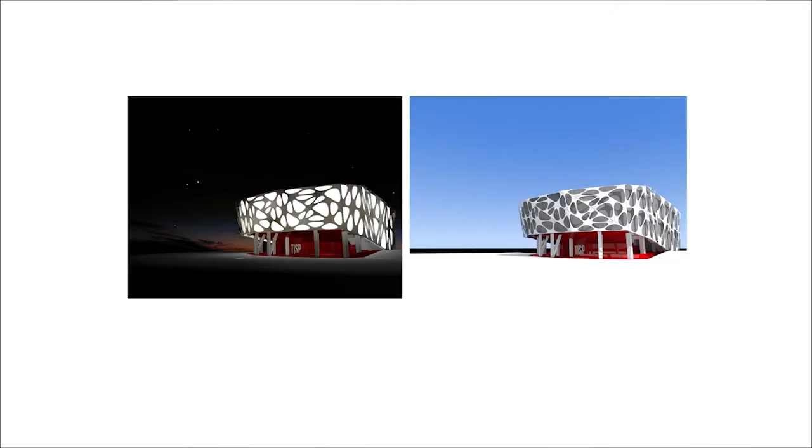The brief was tough because the building itself is already quite iconic, so they wanted another iconic auditorium on top of an iconic building. What we tried to do is create a simple form, because my boss always said iconic buildings normally follow this 3-second rule - if you can draw it in 3 seconds, it's a nice, memorable form.

The idea was to create this auditorium as an iconic building that you can see from far away, because the school also ran out of space for outside events. So the idea was to make it iconic enough that people from outside could view it. It's recently completed - this is how it looks now.

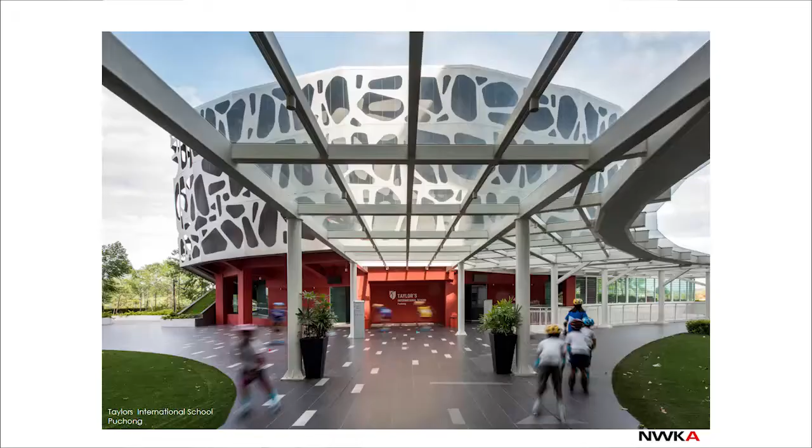We created this form using a Voronoi pattern to cut the facade, creating two faces of the building. During the day you can see the Voronoi pattern in white, but at night we illuminate the facade and it creates a lantern effect, which was quite hard because we needed to make sure the light is even. We used LED lighting to illuminate the facade from behind, so you can see the silhouette. That's the first project.

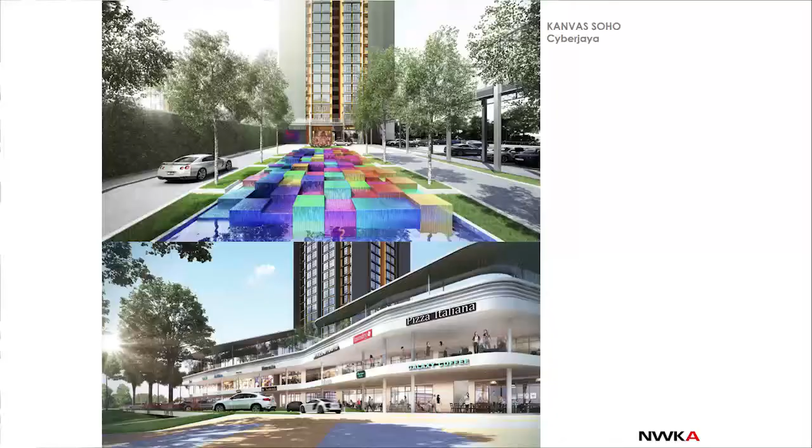The second project is one of my earliest works with NWKA - this is Kanvas Soho, a 450 square foot Soho located in Cyberjaya. The brief was to design a very efficient layout.

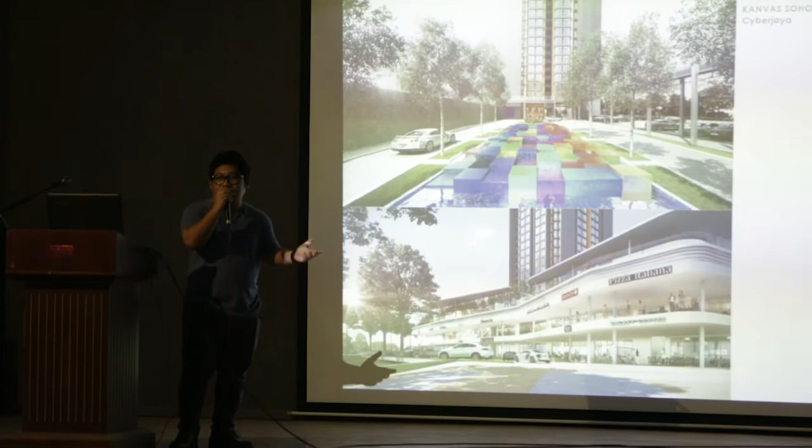So we came out with this point block tower sitting on two levels of car parks. The idea was to make the building not obviously reveal its car park - normally in high rise buildings the killer is the car park podium, so we tried to make everything work on the lower floors without showing it. It's currently almost completed.

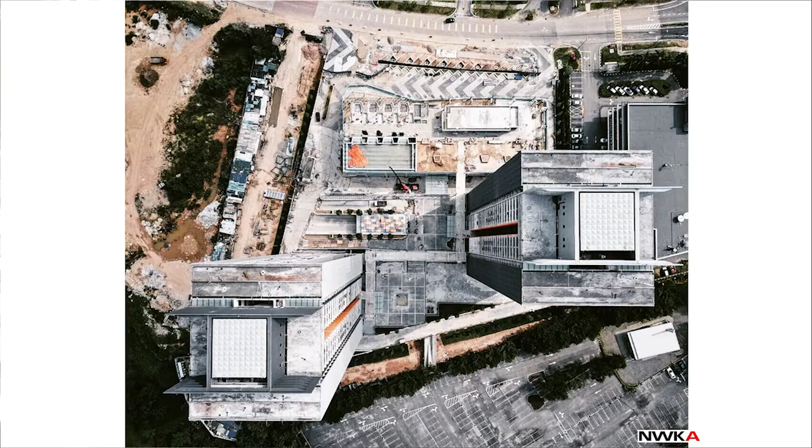This was taken earlier this year. I think the VP will be in September, if I'm not mistaken. That's another view of it.

The third project is OUM, Open University Malaysia. At NWKA, we've done a lot of education facilities as well. For this project we were invited to compete with other architects, and we tried to create a really interesting form. The idea is the same across all our education projects - we try to create a student-centric campus rather than an admin-centric one.

For this one we have three wings and one hostel tower behind. What we're trying to do is create a really lively student center in the middle of the campus.

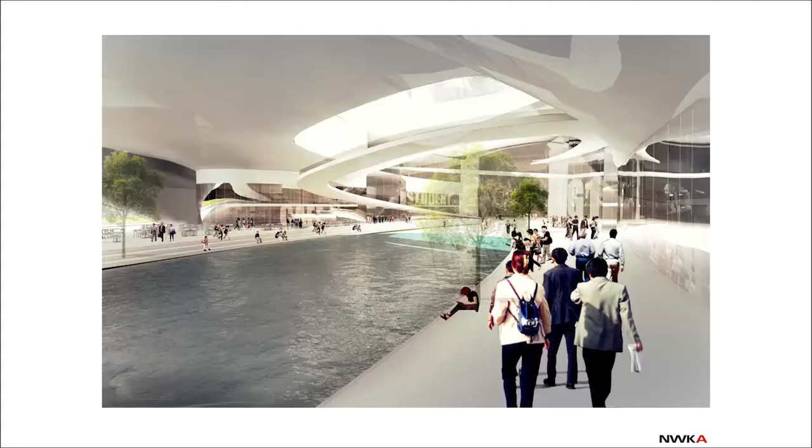Unfortunately, we didn't get the project. I think looking at the form and everything, they are not comfortable with the cost. But it's really an enjoying experience, I would say.

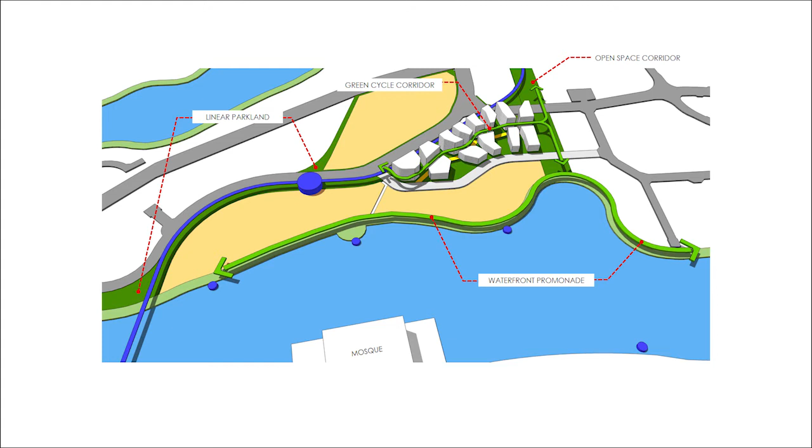The next one is Cycatree in Putrajaya. This is also a competition, we've been invited by PJH, Putrajaya Holding. The brief is simple, just to create this mixed development. So rather than just creating the same building everywhere, our idea is to get what are the things that we can bring to Putrajaya.

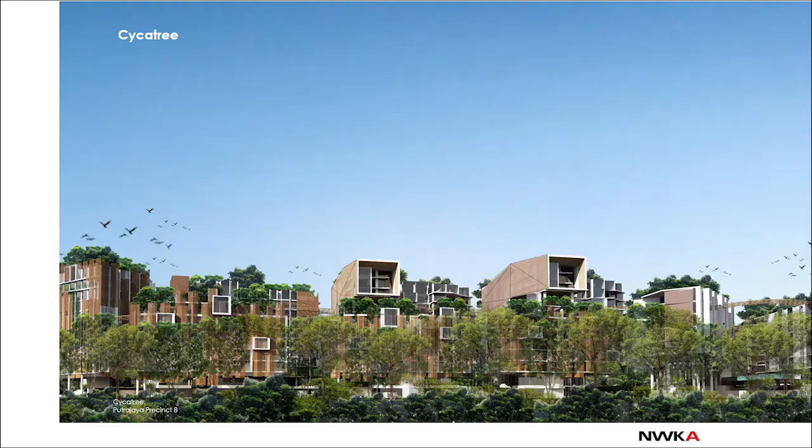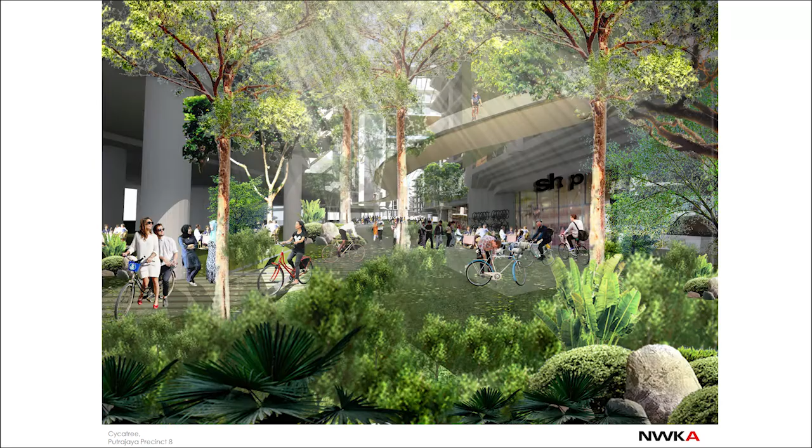We're thinking of this cycling experience in Putrajaya, because Putrajaya is really a cycle center, I would say. The idea is to create the whole ground floor as retail, some park, and some car park below. From ground floor, it's more like an alfresco dining experience, some cafes, some retail. We've tried to connect all the buildings with a cycle park.

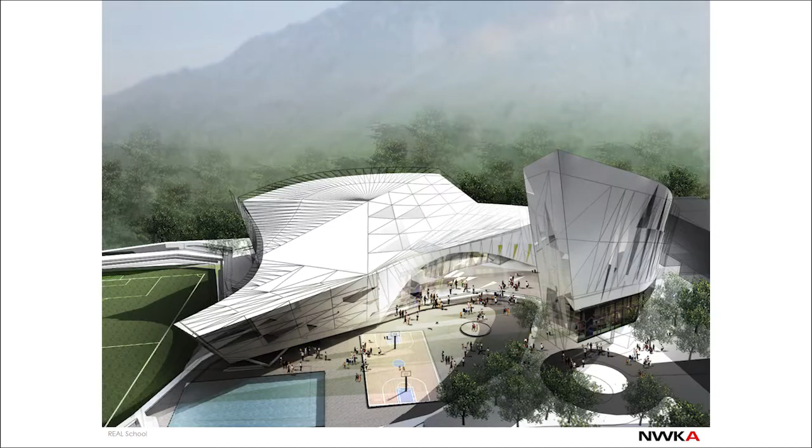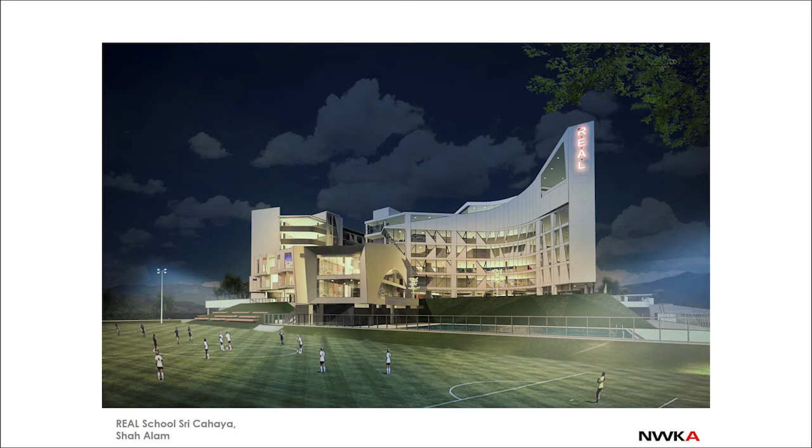The next project is Real School in Shah Alam. This is also a competition, because we've always been invited to a competition. For this project, we've won the competition, and the client decided to go with ours. But after we came out with this, it was a budget burst. So we came out with another option of design. Right now this is the current design, currently in building submission.

Other side of architecture that I really like - some will say it's like a dystopian vision or something like that, but I believe we need to think about it as well.

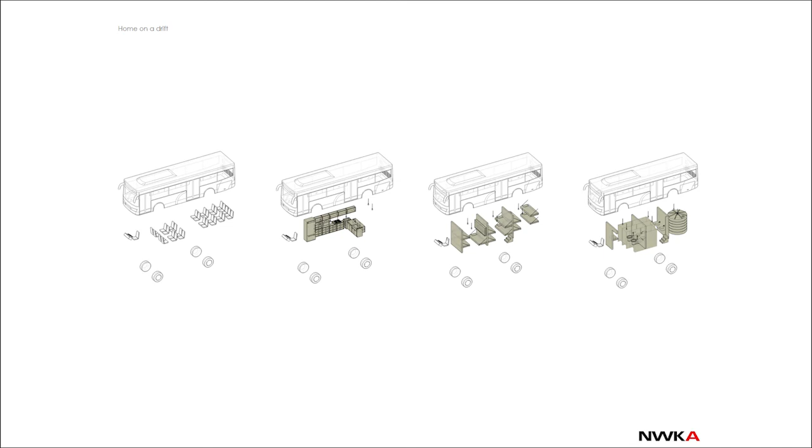The first one is Home on a Drift. This project is actually a PAM competition, a temporary shelter competition. We've won honorary mention for this project. The idea is simple - instead of just finding a space or land which is very scarce in KL, we've decided to use what we have, which is a lot of abandoned metro buses in KL.

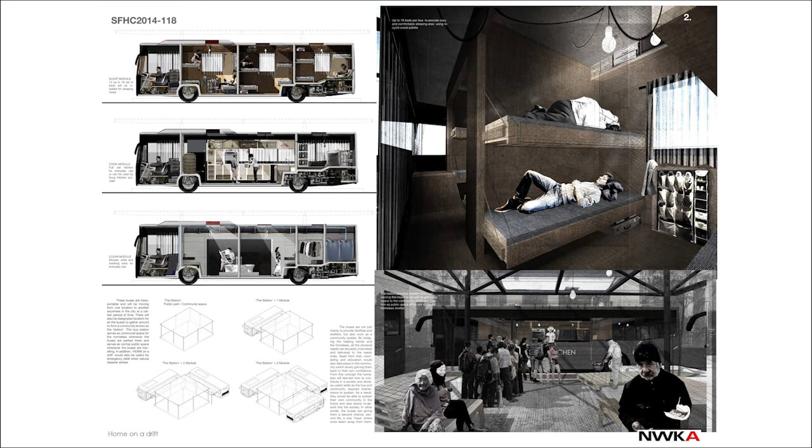So we've decided to use that bus again and create different modules. The first one, as you can see, is the sleeping module. The other one is like a kitchen, and the third is like the toilet module. So basically it can be like a transit center for the homeless.

The second one is Oi Poloi, which means common people. This project we did for the HYP Cup in Hong Kong, and we've got another honorary mention as well. The theme is 'architecture must disappear.'

So we're thinking of the future when buildings become obsolete - what will happen? The current issue is the same as now, where house and property prices are really expensive, and the younger generation can actually afford to buy a car rather than property. So we're thinking of that, and when in the future not many people will work in an office, we thought everyone will stay in these pods.

We're creating these pods. This pod will be connected to an infrastructure tower. The infrastructure tower is just to give power, water, and basic necessities, so people can just plug in their pods to that infrastructure tower.

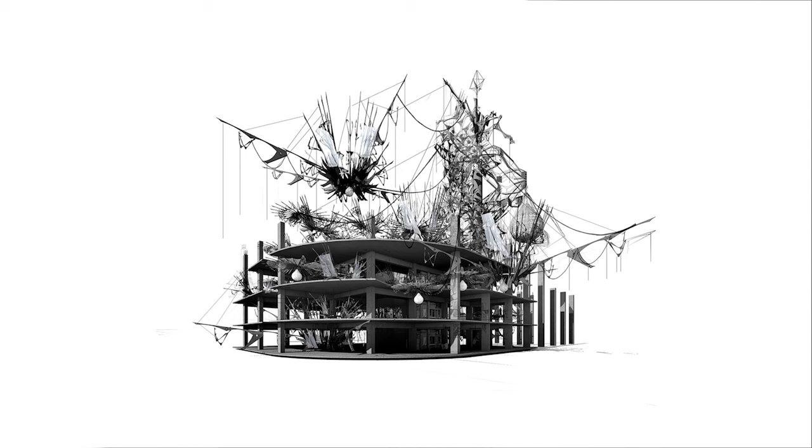We've exhibited this in some exhibitions locally and internationally, and that's the idea basically. This is another view, which is the old abandoned building being used as the common spaces for people.

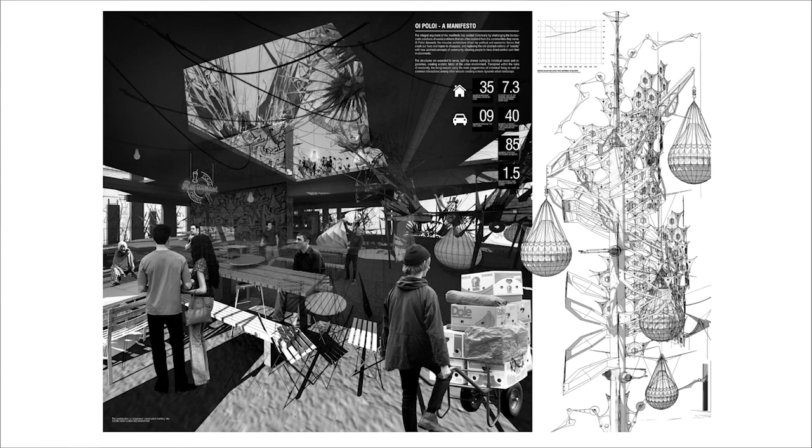I think this will be the last project I want to share. We call this Rhizome. This project is also a competition - we did it for D3 Housing, a future housing competition, and we also got the special mention for dystopian vision. What we're trying to create is a machine or a system, as the issue is still the same in the future.

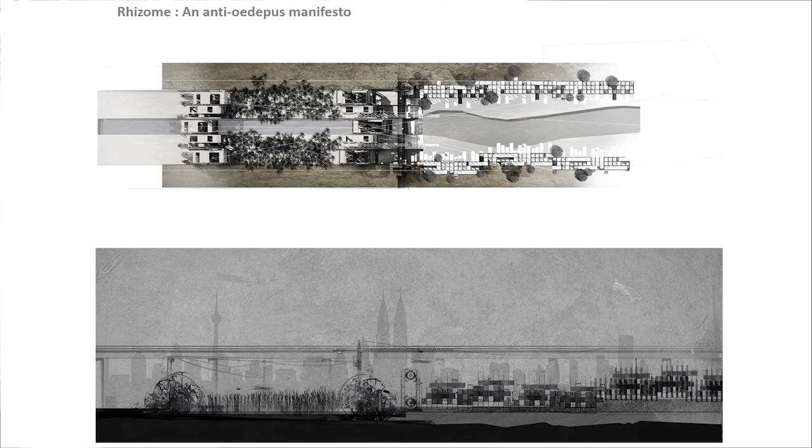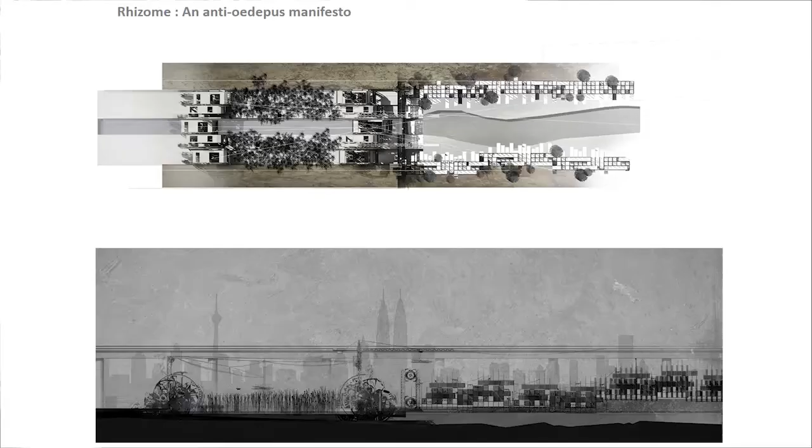Everything is expensive, and we have this property or housing problem. So we've created this system that is a bit of a sustainable system basically. The idea is the site is in KL, at Sungai Klang, which we know now is actually a monsoon drain rather than a river.

So the first set of wheels at this site is like a concrete muncher. The idea is to munch the concrete, and then this system will move, but very slowly. After the concrete is munched, we will plant a bamboo tree. After about 3 years, the back wheel will start to harvest the bamboo, and then it will move along the whole sungai.

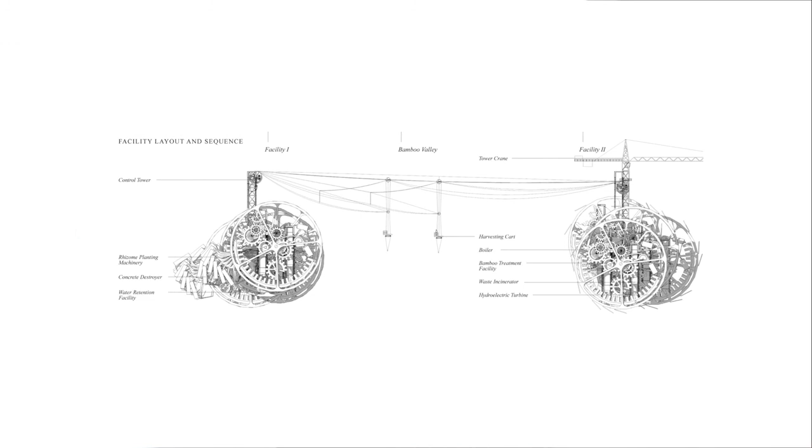You can see in the middle, that's the bamboo valley where the harvesting cart will harvest the bamboo, and the third wheel will be the bamboo treatment facilities and waste incinerator and some other things. For this one also, we've won some awards and been exhibited at PAM Center.

I think last 2 years, if I'm not mistaken, or last year. Yeah.

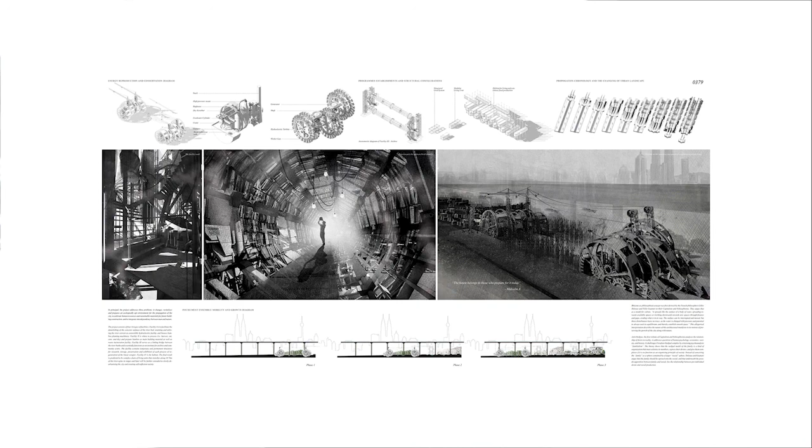So the idea is to get this - even though we're working in commercial architecture, which we have to work with people, I believe we still need to think for the worst case scenario as well, as an architect. That's another cross section of the treatment facilities.

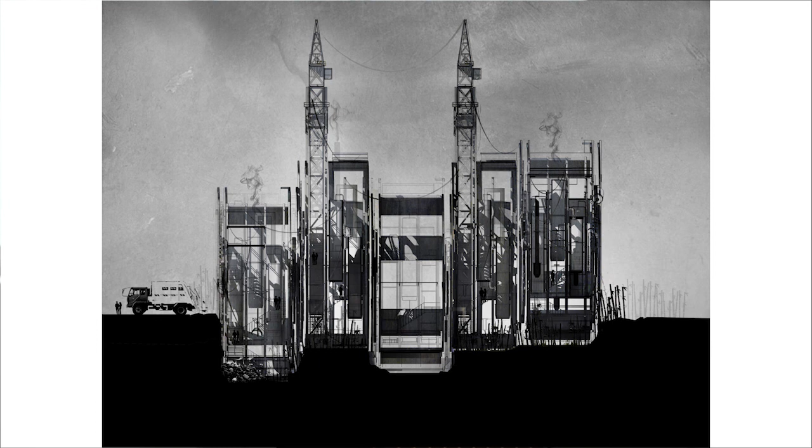Some of the images - I think that's all from me.